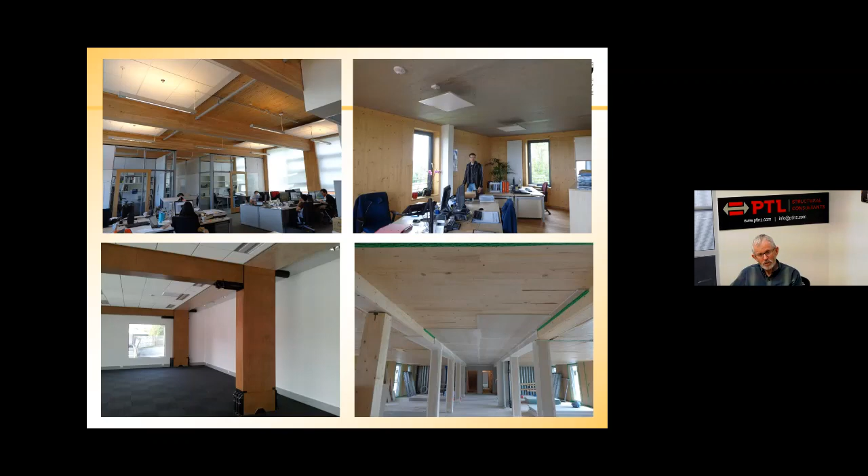I'm going to say something first about pre-flashover fires, then move on to post-flashover fires, because they're two very different parts of the fire experience. It's in the pre-flashover stage where people will be alerted to the fire and have to get out, that's where detectors and alarm systems work. If you're still in the room after flashover, you'll be dead because there won't be enough oxygen to breathe. So the post-flashover stage is where we talk about structural fire stability and fire resistance, which I'll move into.

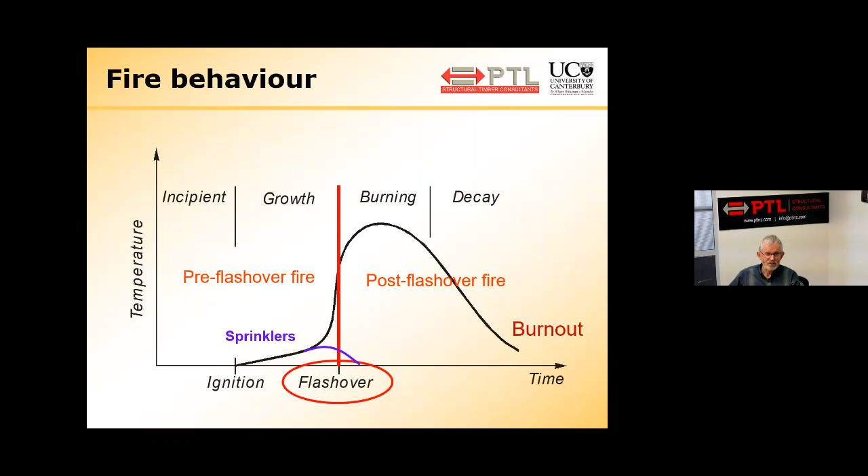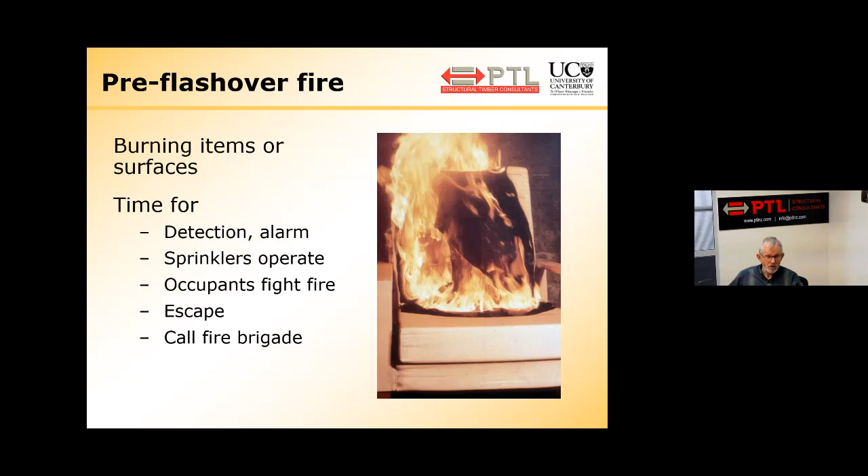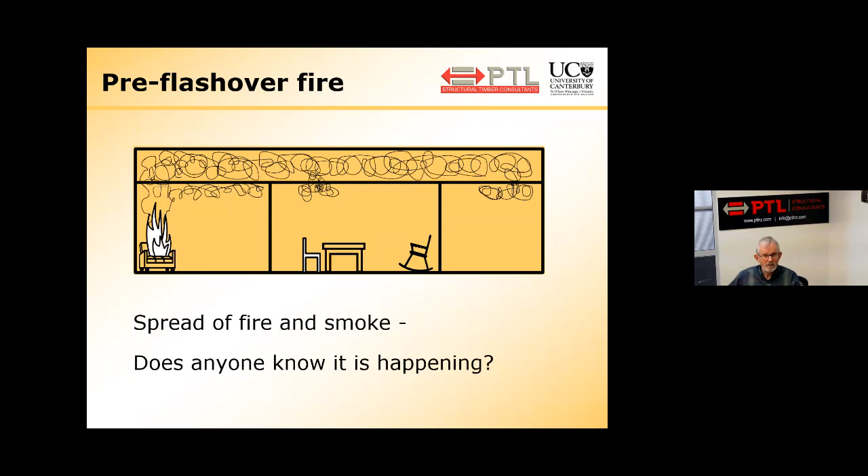Let's say a few words about the pre-flashover fire, which is not of great significance to structural engineers, but it is important. This is where we're talking about burning items or burning surfaces, and this is when we have time for detection, alarm. The sprinklers will operate if they're there, occupants can fight the fire, people can get out, you call the fire brigade - that's the early stage. Fire engineers are concerned about fire and smoke spreading into ceilings, cavities or other spaces, which is part of passive fire engineering that I'm not going to talk much more about.

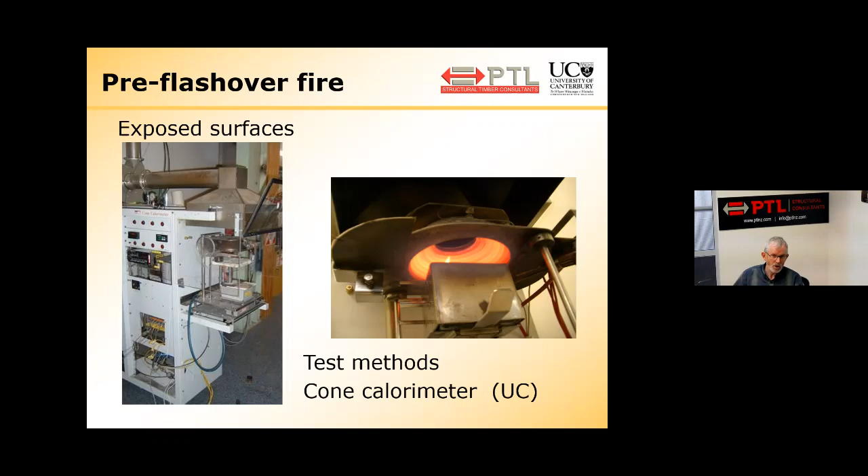The thing that is important in the early stages are the exposed surfaces. What I'm showing here is a device called a cone calorimeter - this one is at the University of Canterbury, but all the fire labs have one. It's a heating device for heating the surface of something to see how it burns and how much heat is released. That's one of the methods of testing wood surfaces to see how they behave in fire.

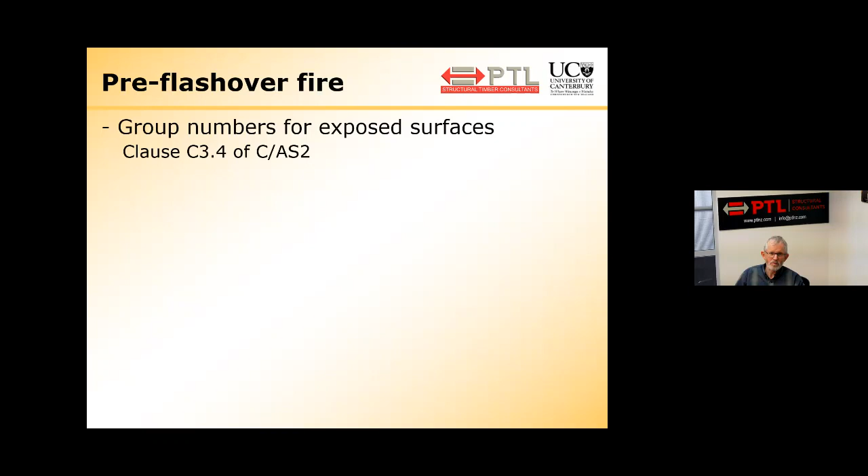Many of you will be aware of the group numbers for exposed surfaces in clause C3.4 of C/AS2. Most of you know that C/AS2 is the acceptable solution for fire design in Part C of the New Zealand Building Code. In that clause, we see a table like this - I've just shown the top of it for clarity, but it lists the material group number required for buildings with or without a sprinkler system.

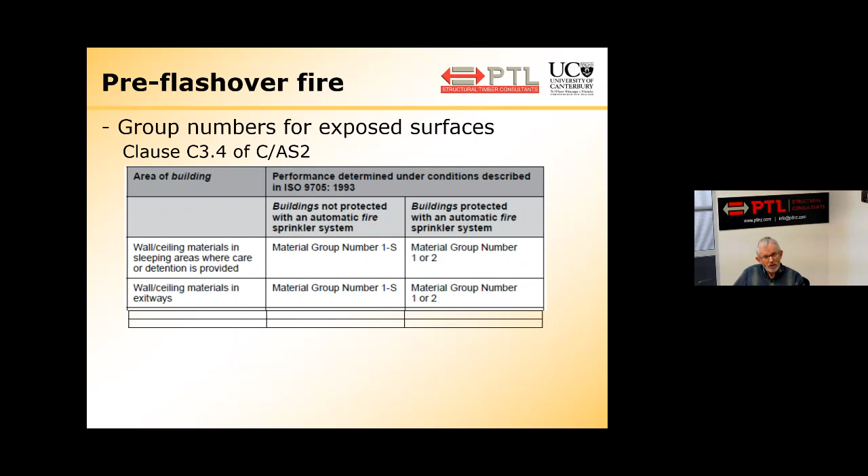In simple terms, we have group numbers 1, 2, and 3. Sometimes there's an S, which indicates a smoke requirement on top of that. But the thing you need to know is that normal wood with no protection is in group number 3. For categories in the table requiring a lower group, you couldn't use wood unprotected, but you could specify an intumescent paint, which would reduce the group number from 3 to 1 or 2, and that's often used. I'm not an expert in that - if you want to know more, talk to your fire engineer.

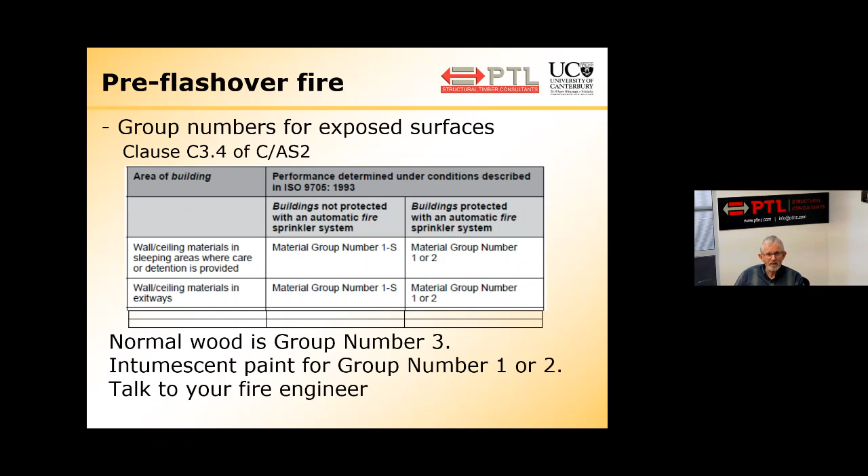I'm going to move on because we've got a lot more to say. Let's now talk about flashover, which is that time when all the combustible surfaces in the room ignite. In the early stages of the fire there will be some heat and smoke, and a hot layer growing in the ceiling, radiating heat to all the surfaces. Then all of a sudden, flashover is a sudden event when everything ignites, sucking all the oxygen out of the room and producing very high temperatures. You don't want to be there when that happens.

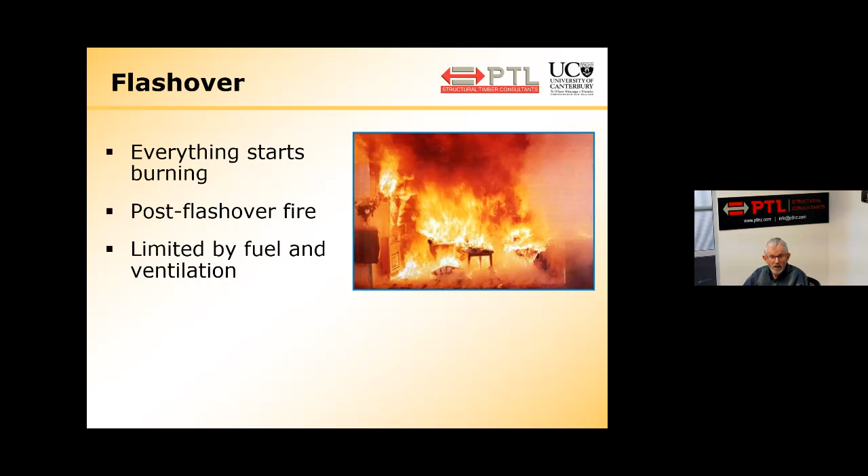In this post-flashover fire, it's limited mainly by two things: the amount of fuel available and the ventilation from the windows. If you've got big windows, you can have a short, fast fire. If you've got small windows, you'll have a long, slow fire. And if there is no ventilation, the fire will go out because combustion needs oxygen.

Let's say a few words about sprinklers, because sprinklers are far and away the best thing you can do to provide fire safety in buildings. There's no question about it. Sprinklers are the way to go.

If the sprinklers are there and they work, you won't have any flashover. You have zero fire resistance requirement. That's not what the code says, but that's the reality of it. If the sprinklers extinguish the fire or control the fire, sprinklers won't always put out a fire, but they're designed so that they keep a fire very small, then that's problem solved.

Although not completely, because sprinklers are not 100% reliable. How reliable are they? Well, the jury's out on this, but 90%, 95%, 98%. Why not 100%? Well, maybe there's not enough water. And by not enough water, that can happen if too many of the heads are activated all at once, because sprinkler systems are only, the pipe work is only enough to supply a certain number of sprinkler heads.

Or if the system is down for maintenance when the fire occurs, or if there's an explosion or an earthquake. We were lucky in Christchurch in the 2010-11 earthquakes, there were almost no fires after the earthquake, but if there had been, there would have been a problem, because most sprinklers rely on water in the street mains, and if there's no water, the sprinklers don't work, and that could be a problem.

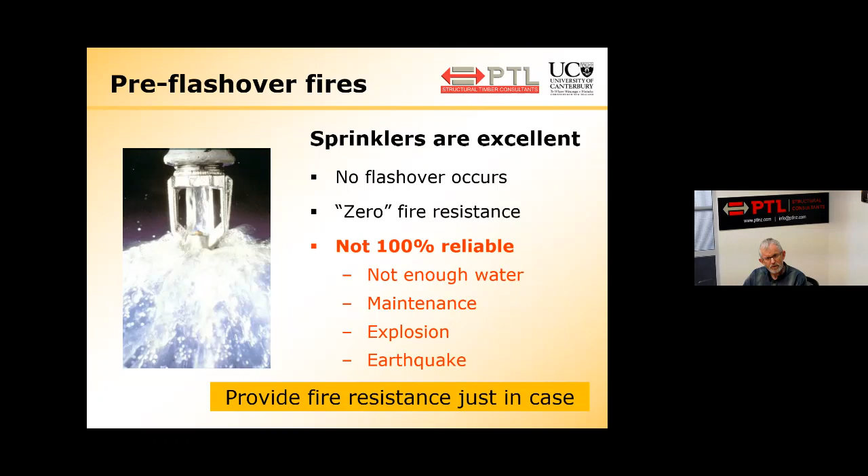So this is what we do. The building code says provide fire resistance just in case, even if you have sprinklers.

But I'm now going to move from a little building like that to a big building like this. And I'll just say a few words about this building. This is the First Interstate Bank building in Los Angeles. And this is way back in, I forget the year, but that's a 62-story building. And that is showing a fire which occurred on the 12th floor. So there were 50 stories above that fire.

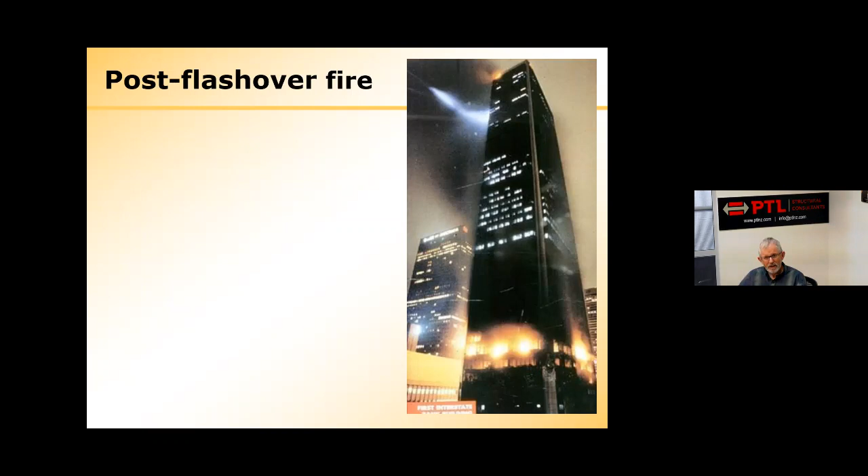And if that happens, what do we need? We have to provide fire resistance. What's fire resistance doing? It's doing two things. It has to contain the fire to prevent the fire spreading inside the building or outside the building.

There are still people up there. See the lights on the upper floors, and if there are people up there, they have to be protected by prevention of the fire spreading. So fire resistance is initially about preventing the spread of fire horizontally and vertically in buildings.

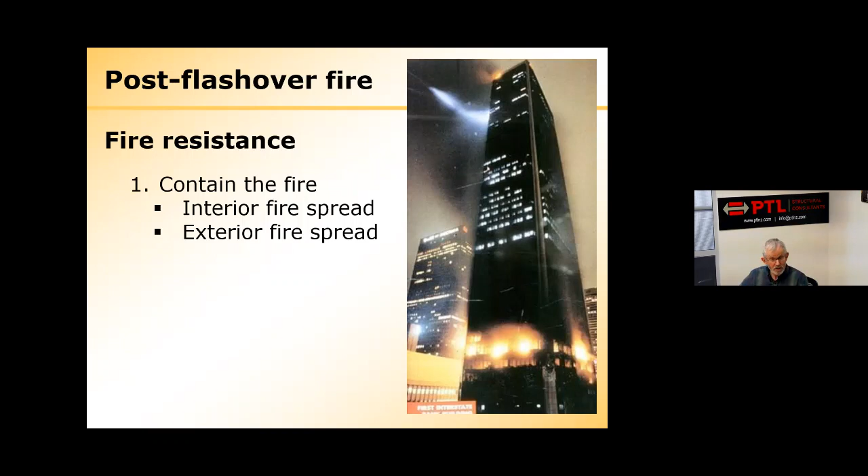But in addition to that, of course, we have to prevent collapse, because if that building fell over, it would cause a lot of problems.

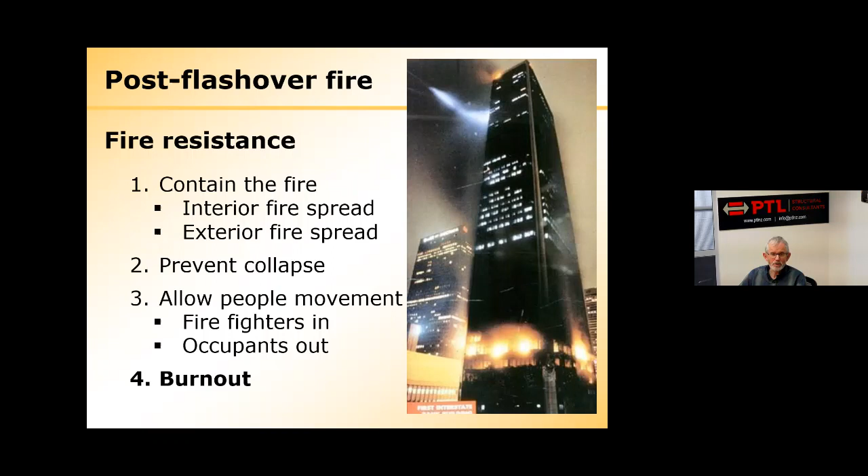The third thing we have to do, which is sort of a result of providing fire resistance, is to allow people movement so the firefighters can get in and the occupants can get out. And in some cases, there's a fourth thing that we should do, which is to design the building for burnout. In other words, answer the question, what happens after the fire goes out? Because if there's nobody there, or if people leave the building and come back tomorrow, what happens in the meantime? Well, that's often ignored in fire protection engineering, but it's actually very important.

Let's move on. Fire resistance. How do we provide fire resistance? Well, the most common way of providing fire resistance is to do a test, a fire resistance test. And there's a furnace that happens to be a Canadian furnace, National Research Council of Canada, but a furnace for doing fire tests of walls. They're all the same.

It's a box where gas can be pumped in and ignited, and there'll be ventilation and measurement of temperature, and that's what the furnace looks like. So that's the primary method of determining fire resistance.

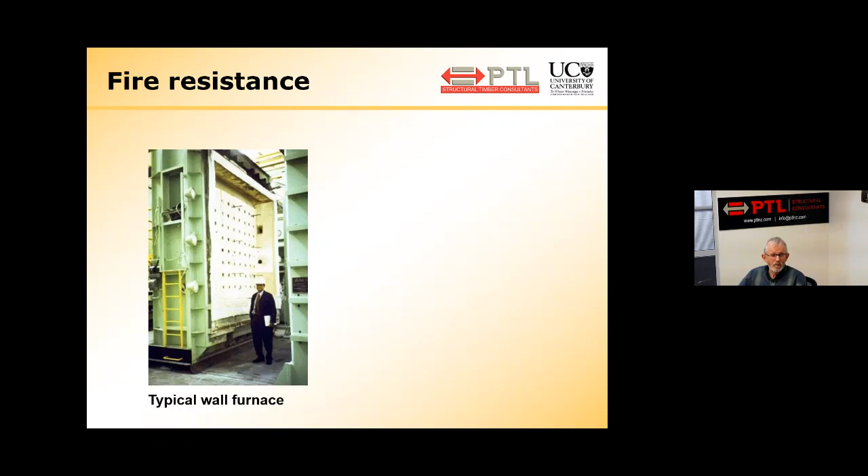To obtain a fire resistance rating, you do a full-size fire resistance test. What do we mean by full size? Well, most testing standards say 3 meters by 3 meters or bigger. Why is it so big? Well, it's that size because you pick up defects in construction, joints and connections which you would not pick up in a smaller furnace.

However, there's another way of obtaining fire resistance, and that's by calculation. We can calculate the fire resistance of lots of things, but it's usually only if that calculation method has been verified by some full-scale fire resistance tests.

And that's a Canadian furnace. We have furnaces in New Zealand, Australia, and around the world. The testing for fire resistance is very similar in all countries around the world.

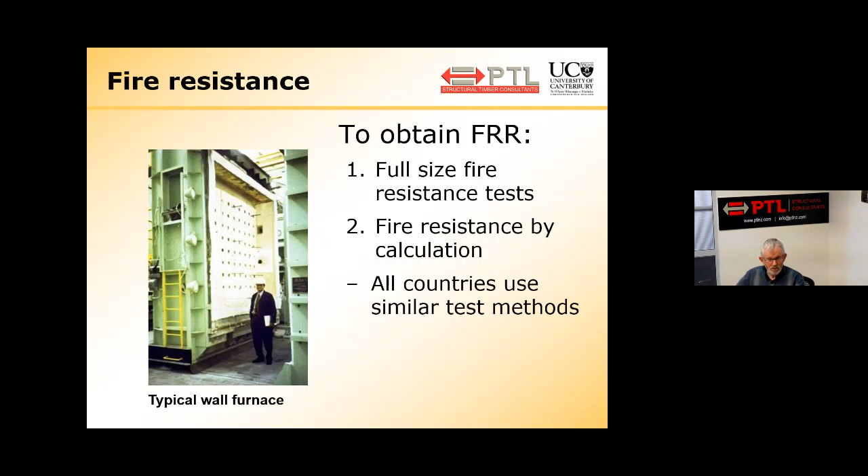I'll just pop back to that question I raised before about fire spread on surfaces and testing for flame spread and smoke produced. Those tests are different. There are lots of different tests for those, which makes things messy. But when we come to fire resistance testing, the fire test furnaces are similar and the fire test results are similar, and that means that in most cases, if we have a fire test report from Europe or the US or Australia, we can use it in New Zealand because of that similarity.

What I'm showing here are the time temperature curves from fire resistance tests. There are 4 curves on here, but the ones we're interested in flow up the middle like that. It's the International Standards Organization, ISO 834 fire resistance test. And that is the same fire test we use in New Zealand, AS 1530, and it's almost the same as the American test standard, ASTM E119, which you can just see dotted behind it.

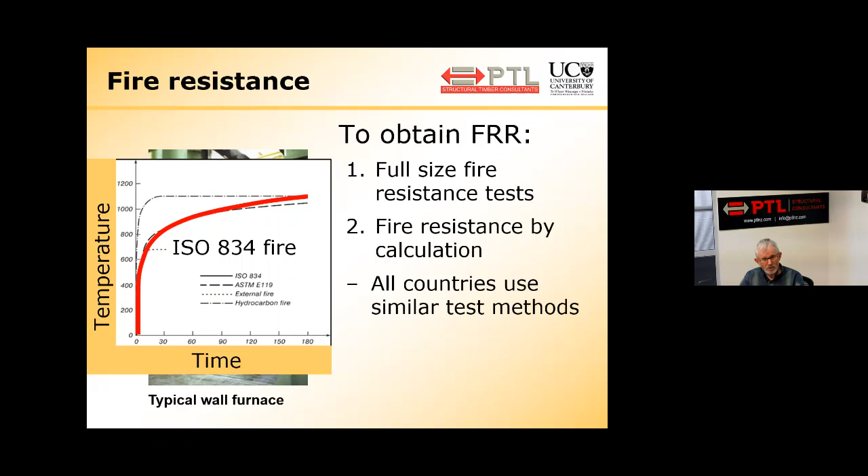The top curve for the hydrocarbon fire is not normally used for buildings, it's used for offshore facilities and things like that, and the other lower one's not used much either. The curve we're interested in is that bright red line, which is the standard test fire, and it doesn't matter where in the world you do a fire resistance test, that's the curve that will be used.

But in order to pass the test, we have some criteria, and you may have seen this before. What I've got in here are the failure criteria for passing or failing a fire resistance test, and there are three criteria. What we call structural adequacy - it used to be called stability, but that was a misnomer because it's not about instability, it's about structural adequacy. To pass the structural adequacy simply means that we prevent collapse, carry the load.

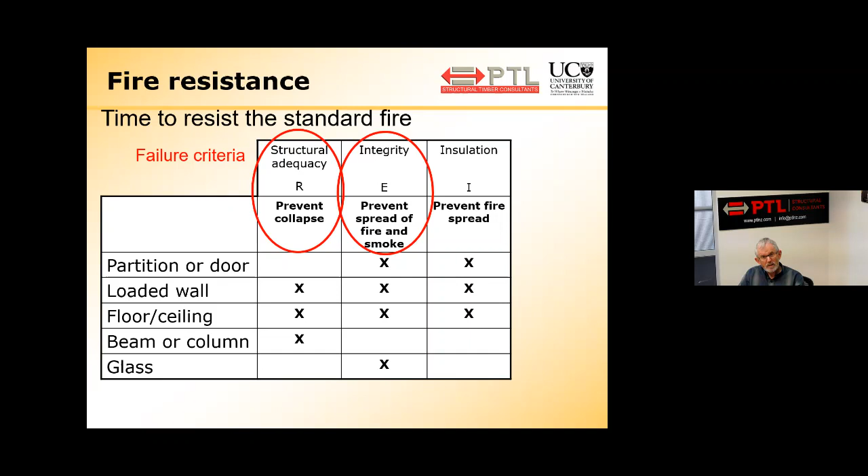And integrity - to provide integrity, we have to prevent the spread of fire and smoke, which means that during the test there shall be no gaps or cracks or fissures where fire and smoke can get through locally. And then we have an insulation requirement, which is just measuring the temperature on the unexposed face to stop the fire from spreading. You see some letters in there, REI, and those are used in Europe. Often they'll be talking about the REI values.

But what you can also see with the X's in that table is that the requirements are different for different things. So if, for example, we have a partition or a fire door, there's no structural load, so we don't have to meet the structural adequacy requirement, we just have to meet integrity and insulation. And if we have a fire door or a partition which has a 60-minute rating, it will often be spelled out like this, -60-60, which means 60 minutes for integrity, 60 minutes for insulation, with no rating for structural adequacy.

On the other hand, if we have a load-bearing wall or a floor ceiling, in those cases we have to provide structural adequacy and we have to provide the containment function, integrity, insulation, and it'll be 60-60-60, or perhaps 30-30-30 or 90-90-90. For a beam or a column which is only carrying load, it has no containment requirement, it would be 60-, and for the glass in a fire resisting window, it will be -60-. So that's what we're trying to achieve in our fire resistance test.

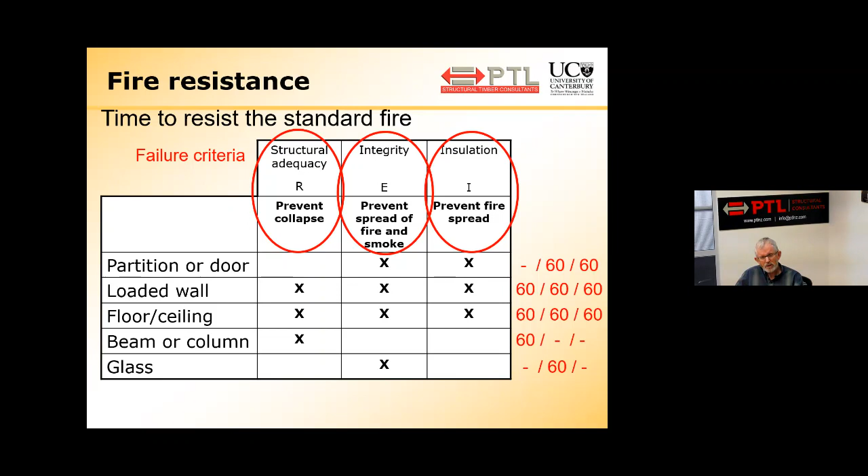I'm going to talk more about structural fire resistance where we don't have the containment option. But let's move on. What I want to say is that standard fire is not a real fire, and everything is different.

The photograph on the right is a fire in a compartment. This was done some years ago at BRANZ. There's just a box there, a fire compartment, about 2.5 by 3.6 meters, a room size, with a facade built there, and you can see huge flames coming out the window.

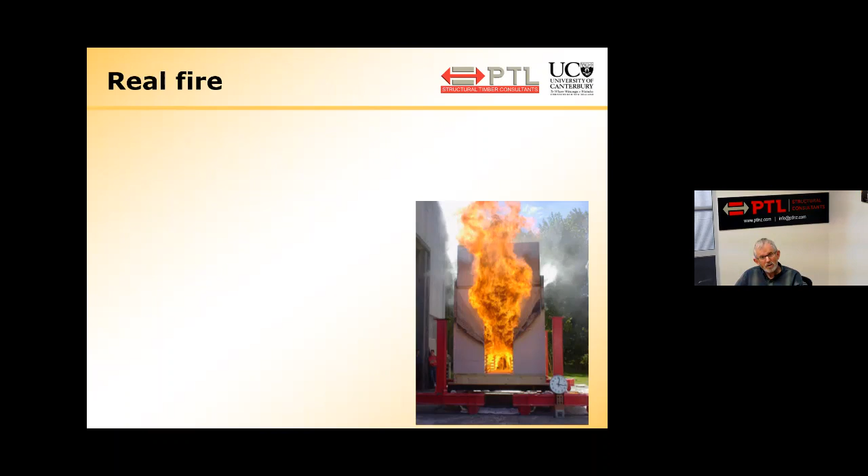How hot did it get in here? Well, here are the temperatures at different places and times. You can see the temperatures rose very rapidly to 800 degrees and eventually to 1,000 degrees. Down here I have the standard test fire, and you can see that in the early stages of a realistic fire, the temperatures are likely to be much hotter than the standard fire.

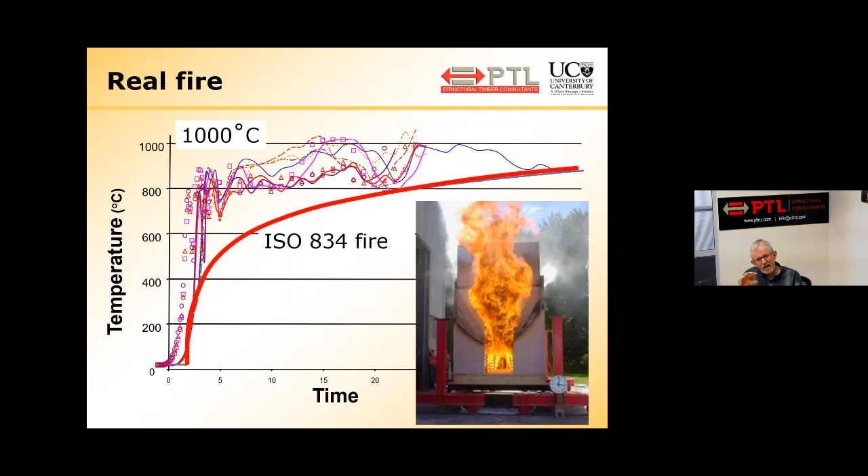So what does that mean to the fire engineer? I'll come on to it in a minute, but all of the fire tests referred to for testing walls, floors, and penetrations use the standard fire. So we have to take some account of that if we're going to be using these for a hotter fire.

So this is just a bit more fire science. In the building codes around the world, we have something called a parametric fire. The parametric fire is a calculated, realistic fire, which gives a graph of time versus temperature.

There are two different sets of curves there, because at the top we have the gypsum curves and lower down we have the concrete curves. Those are different because there are three factors that affect the fire severity. One is the thermal properties of the building enclosure, and that's why if we have a highly insulating compartment, we get hotter temperatures.

If we have a material like concrete, which can suck a lot of the heat out and get hot, then the fire temperatures are cooler.

And then we have the size of the windows in the fire cell or the fire compartment. This set of graphs has been done for one set of window sizes with an opening factor of 0.04, which is a sort of average opening factor.

If we have a fire in this room with a certain amount of fuel load, we'll find that we'll have a time-temperature curve that will go up the green line, and when the fuel is all burned out, it won't be quite as sudden as that, but as the fuel is burned out, we'll have a decay period and the fire will drop.

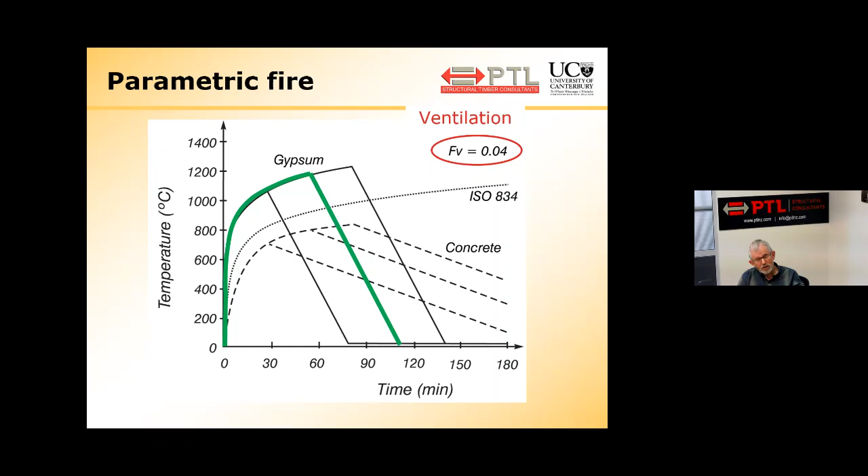Then we go back and look at the standard curve. The formula for the standard curve just goes on and on, but there are methods of calculating a time equivalence. The time equivalence simply says that if we know what the real fire looks like, we can say that's equivalent to a longer time of the standard fire, and that can be used in lots of ways. So that's all I'm going to say about that now.

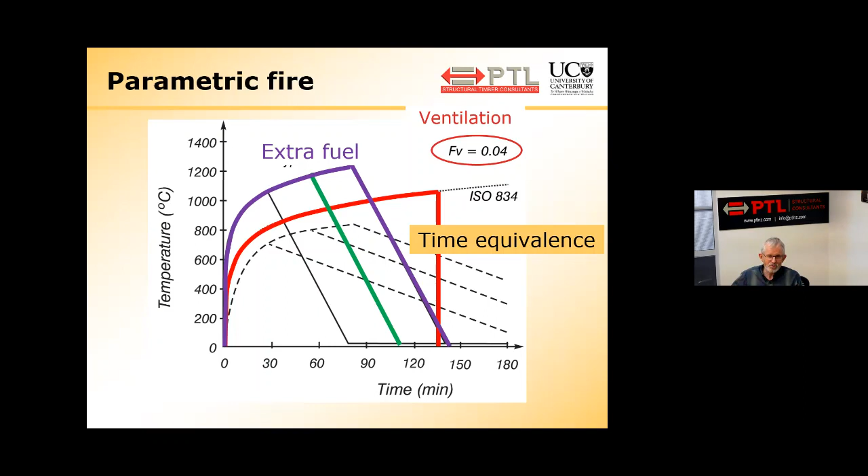If you want to know more, do some more reading, but it will help you get some understanding of where we're going.

Let's get started. Why do I say let's get started? Well, just about everything I've told you up till now applies to all buildings - concrete buildings, steel buildings. I now want to start talking specifically about timber buildings and what's different when you have wood in your building.

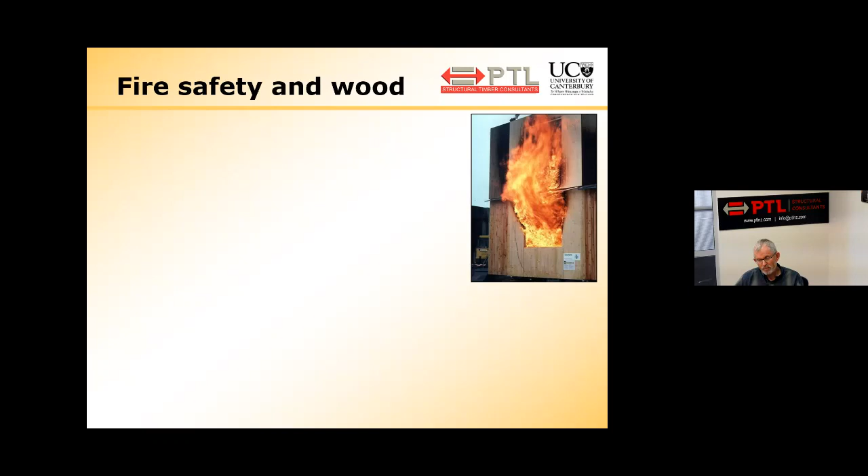There are three main things I want to say. The first one is that wood surfaces are combustible. Wood burns. And there are people out there who have various paint-on finishes which will stop wood from burning.

They'll tell you that, but for most of them, I would say I don't believe it unless you can prove it. And there is really very little proven material that can stop wood from burning.

The intumescent paints we talked about before can stop the surface spread of flame in a building, but once the fire gets out of control, we get into a post-flashover fire. The temperatures are so hot that surface finishes will not stop the wood from charring. So if we're going to stop the wood from charring, we have to cover the wood with something.

I'll come onto that later. More than that, if the wood surfaces are exposed, we have to allow for the extra fuel load in that wood. But the best thing we can do is install sprinklers and solve the problem.

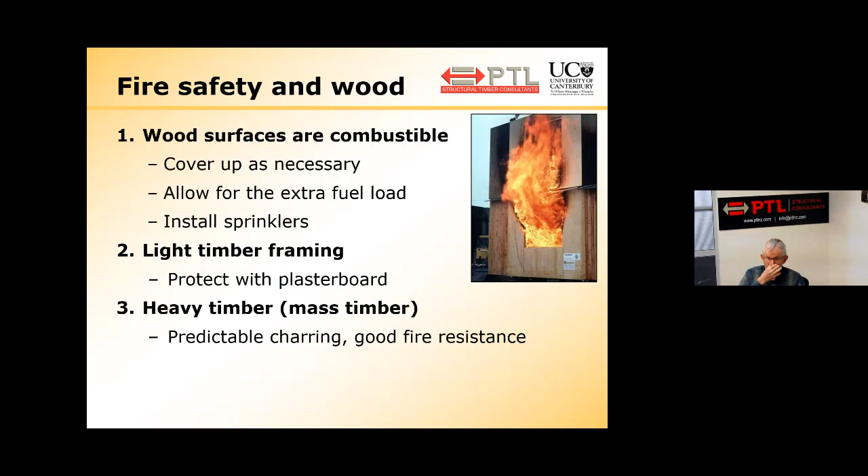I'm going to talk a bit about light timber framing, 2x4 construction, studs and joists, and the strategy there is simple: we protect with plasterboard. I'm then going to talk about heavy timber, or mass timber as it's called now, where from a structural point of view we have predictable charring, good fire resistance, and we can sort a lot of things out. So let's move on.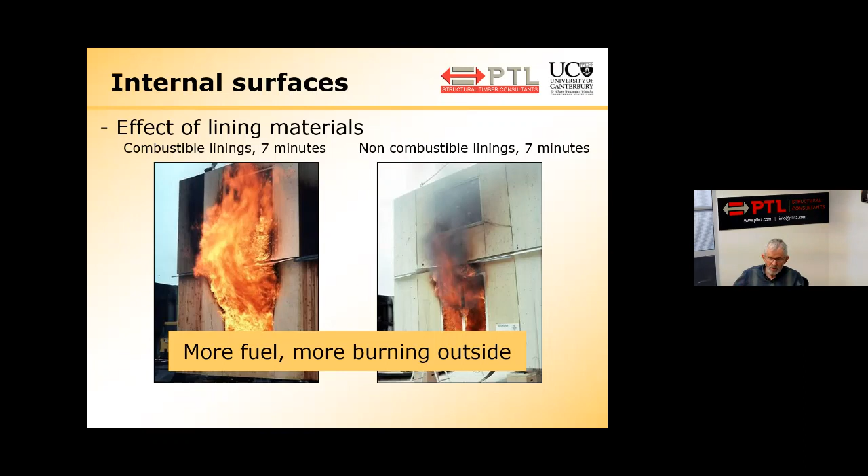If we have more fuel in the room, the fire becomes ventilation controlled. When it's ventilation controlled, more of the combustion takes place outside the room than inside, because there's not enough oxygen in the room. That can actually be a good thing inside the room, because it means we don't have as much energy released there. But on the other hand, it's a bad thing because it can lead to fire spread up the building via the windows. So it makes a difference.

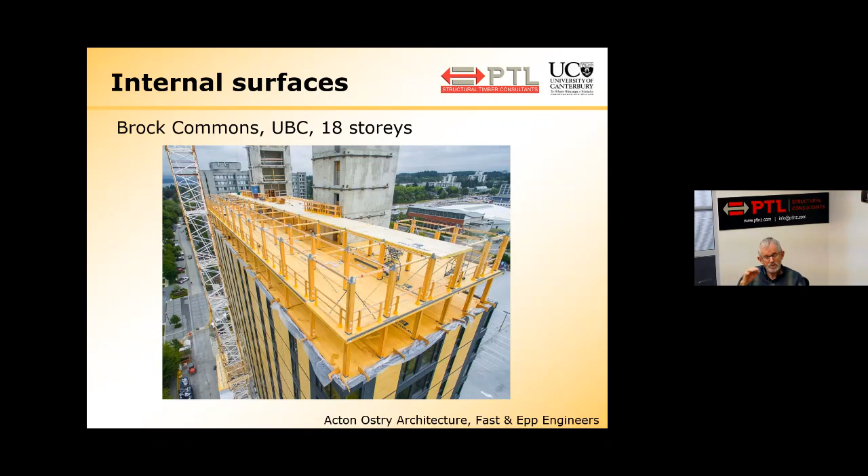To give you an example of where this might lead: some people call this the tallest timber building in the world, Brock Commons at UBC, which has concrete stair cores and lift shafts - you can see them in the background. There are 18 stories of wood with CLT floors and glulam columns. But if you go to that building, you don't see any wood at all. It's fully encapsulated, and all of the wood is protected with 3 layers of gypsum board.

So if you're going to build in wood, why do you build in wood? Well, the first reason is to see the wood - but in this building, you won't see any of it. The second reason is to sequester carbon and avoid the carbon polluting effects of concrete. You get that benefit no matter how much encapsulation you have.

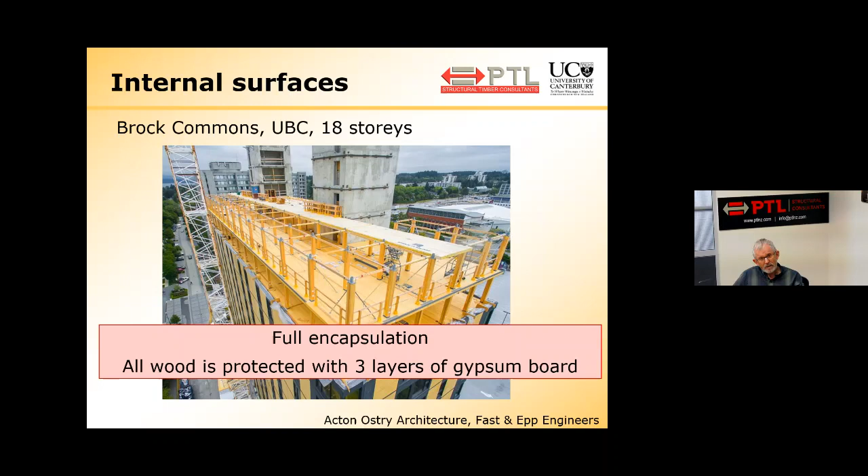And time and cost. So let's just go back again to this picture. Containment - I want to talk about containing the fire, because this is very important.

I've got some photographs here I'll cover briefly, looking at some Japanese fire tests from nearly 10 years ago, sponsored by the Japanese government. They were looking at fire safety in schools, built a whole school building like this, and lit a fire deliberately on the ground floor to see what would happen. The building burned down. There was plenty of fire resistance in the floors and walls, but what was missing was fire resistant gaps, joins, doors, and interfaces.

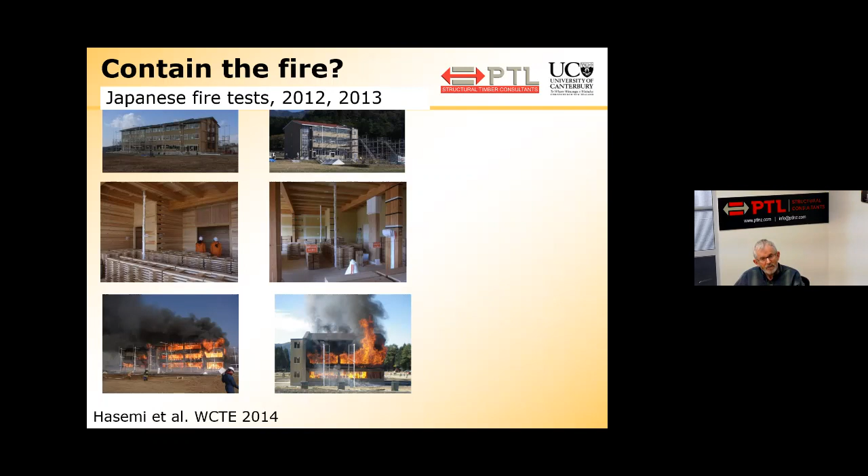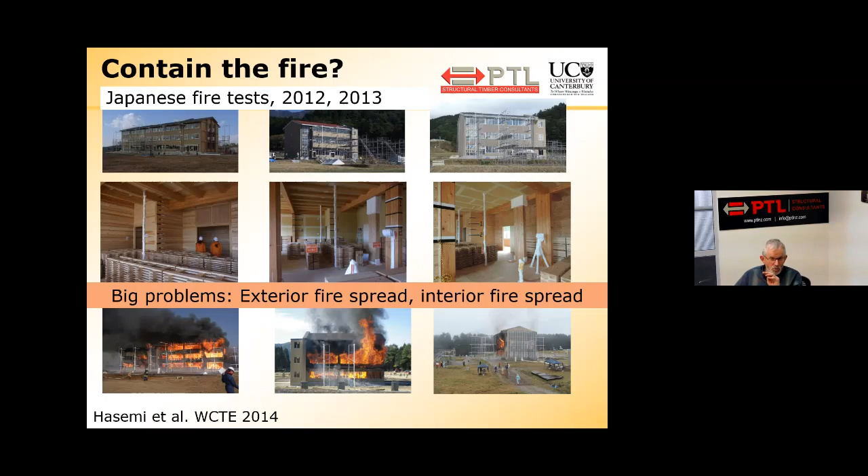They did the same thing again with a second building and managed to contain the fire to 2 floors. They did it again, and eventually managed to contain the fire to the room of origin. But this cost them $10 million. And what were the problems? Fire spreading outside and inside. So your fire engineer is going to be concerned about this. This is why we provide fire resistance, but we actually have to provide more than fire resistance.

So light timber framing is fantastic in a fire. It can do its job provided there's enough gypsum there for the duration of the fire.

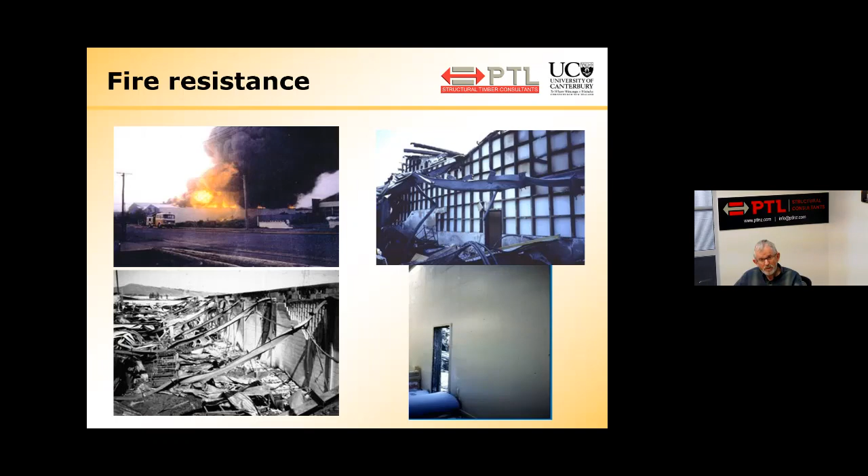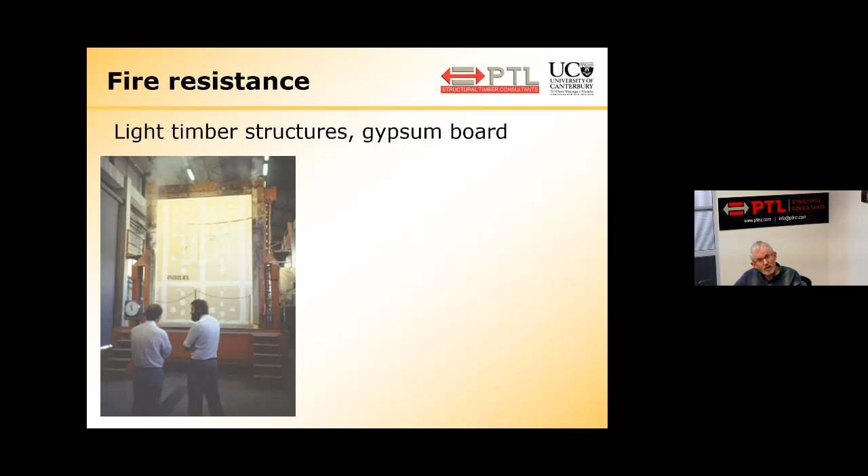Here's a test at BRANZ with a fire wall being tested. In most cases, that's all you'll see for the entire duration of the fire. Sometimes you get an integrity failure like this and it actually burns through - very unusual, but it can happen. In either case, after the fire, when the GIB board is taken off, the studs are charred. The fact that you get a 60-minute fire rating for a GIB board wall doesn't mean no charring.

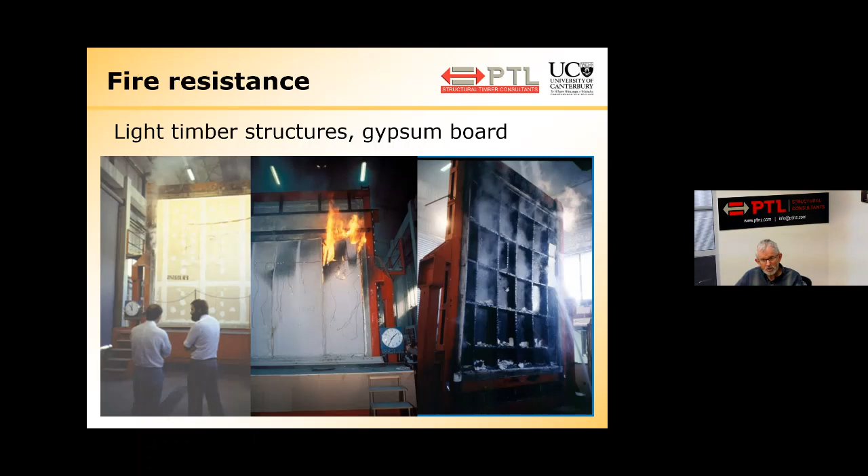It means that the wall can meet those 3 criteria for 60 minutes. In other words, it can carry the load for 60 minutes, charring or not, and it can stop fire spread through integrity and insulation.

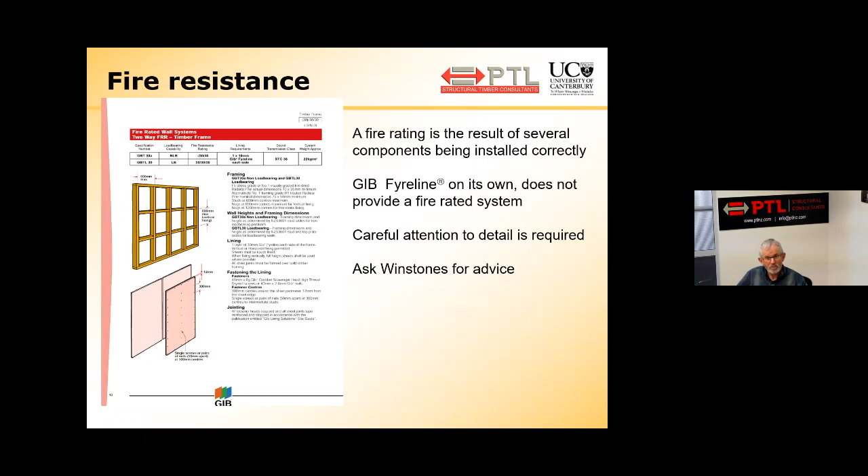And if you want to know more about that, go talk to Winstones Wallboards and look in the GIB manual, because all the stuff is there. And if you don't see what you want, talk to Winstones.

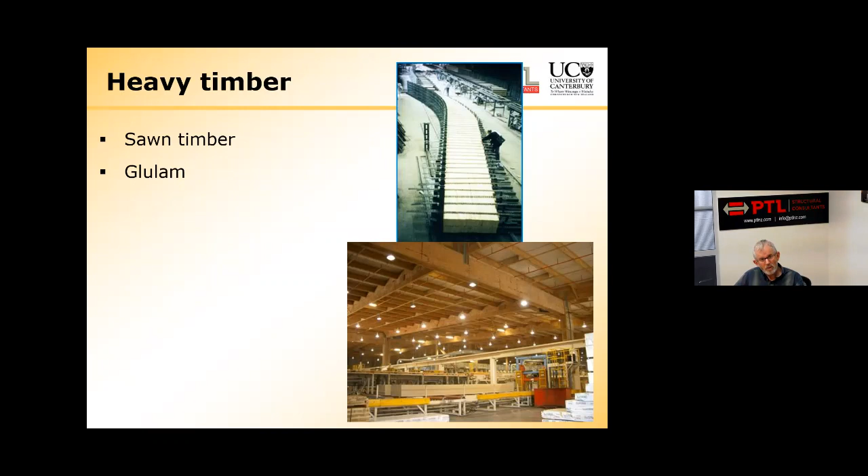I'm going to move on to heavy timber. Big glulam beam on the right, an LVL roof lower down. Heavy timber can be large pieces of sawn timber, but not very often - more often we're talking about glued laminated timber or laminated veneer lumber. The new product now is cross-laminated timber, big new panels. Red Stag are just opening their factory now in Rotorua, and they can make huge panels, 16 metres long and 4 metres wide, up to 200 millimetres thick - enormous lumps of wood.

Question is asked often about adhesives - what's the glue that's used to glue these things together? The traditional adhesive is resorcinol formaldehyde, which is excellent in fire. More often we have melamine products, which are pretty good in fire. The most recent products, including cross-laminated timber, use polyurethane adhesives, and there's a bit of a range there.

The standard polyurethane adhesive has some problems in fire, but Henkel, who produced that, now have a new fire-resistant material, so I'm going to specify fire-resistant adhesive for all of my glued wood products, and we'll just see how that plays out. What's happened is that fire-resistant adhesives are now required in North America - if you make cross-laminated timber in the US or Canada, there's a manufacturing standard which requires the fire-resistant adhesive. In Europe, New Zealand and Australia, it's not yet required, but I think we're going to see it being adopted. Watch this space.

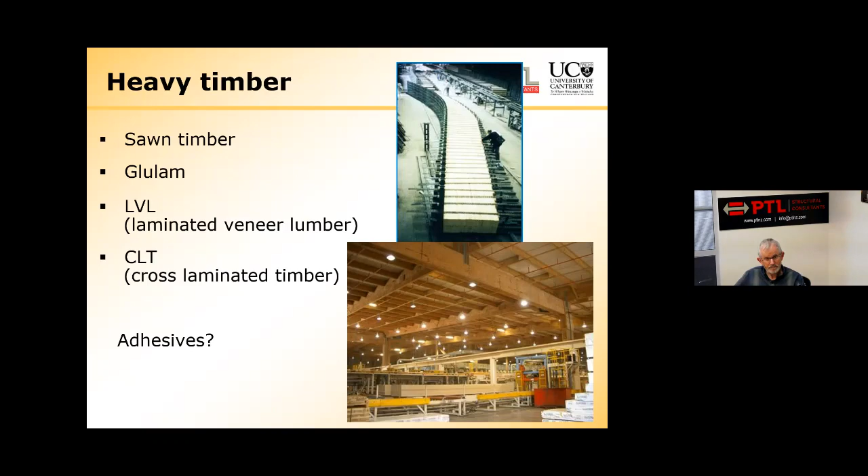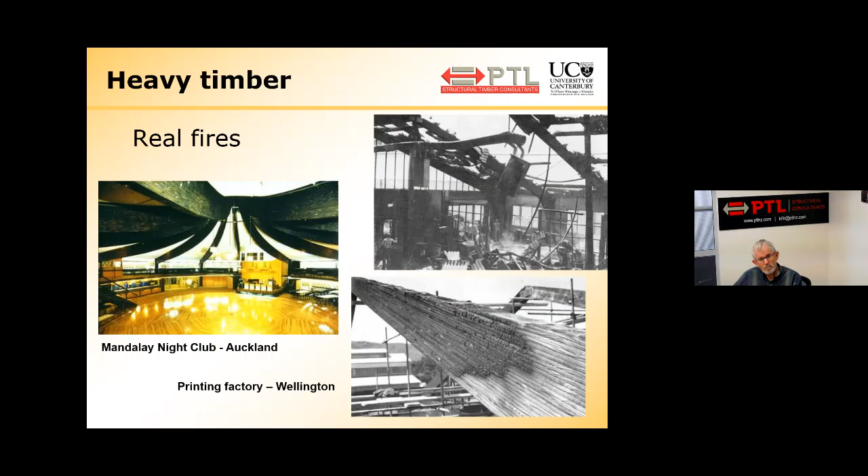I'm going to move on pretty quickly. These are old photographs of buildings in New Zealand which had fires, and the charring was such that the buildings were repaired and reused after the fire. And a timber bridge in Canada, same thing.

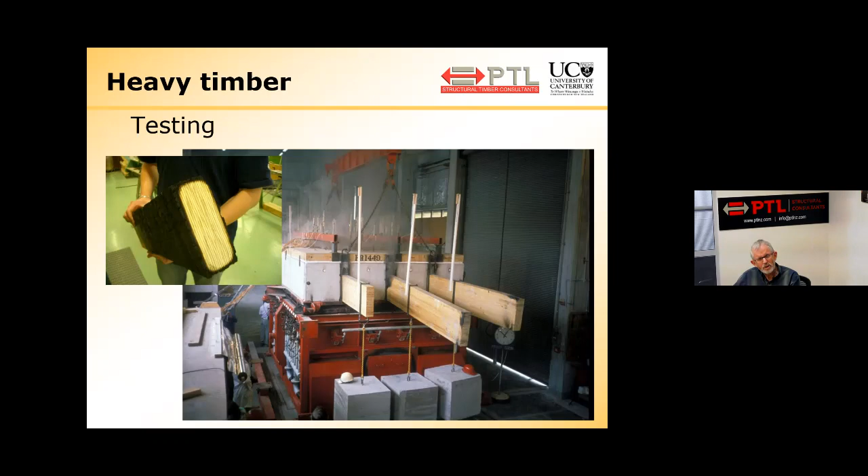Here's a fire resistance test at BRANZ of a floor and beams with big applied loads, with concrete blocks on the ends. This is not from that test, but what we all know happens with massive timber in a test is we get charring around the outside, and we can rely on the wood on the inside to provide the fire resistance.

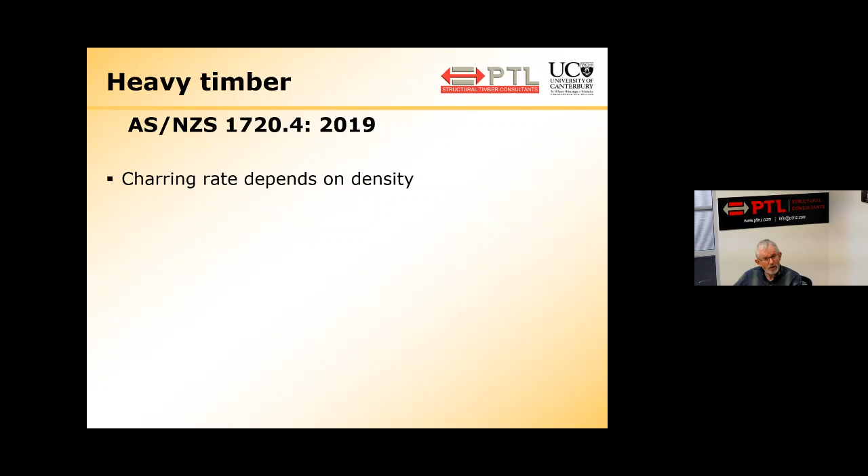We have a new standard, AS/NZS 1720 Part 4 2019, which is going to replace the fire chapter of 3603, and that's got some clauses which tell you how the charring rate depends on density. It says specifically for New Zealand grown radiata pine, the charring rate is 0.65 millimetres a minute, but we have to also take off a 7 millimetre zero strength layer under the char.

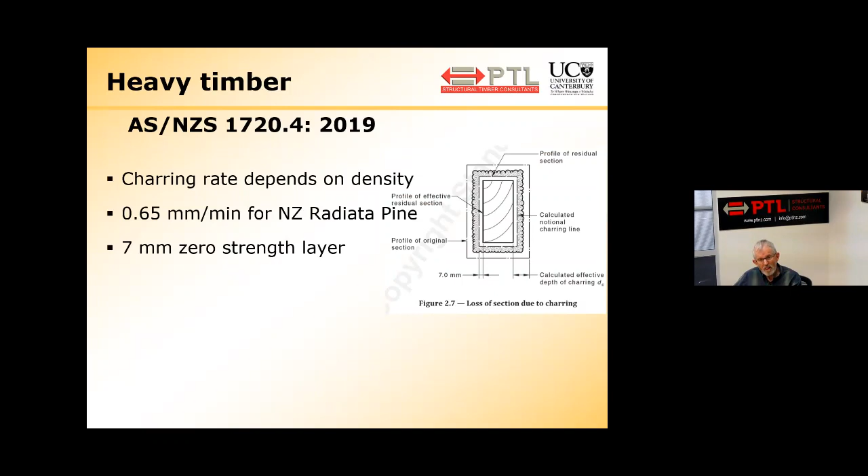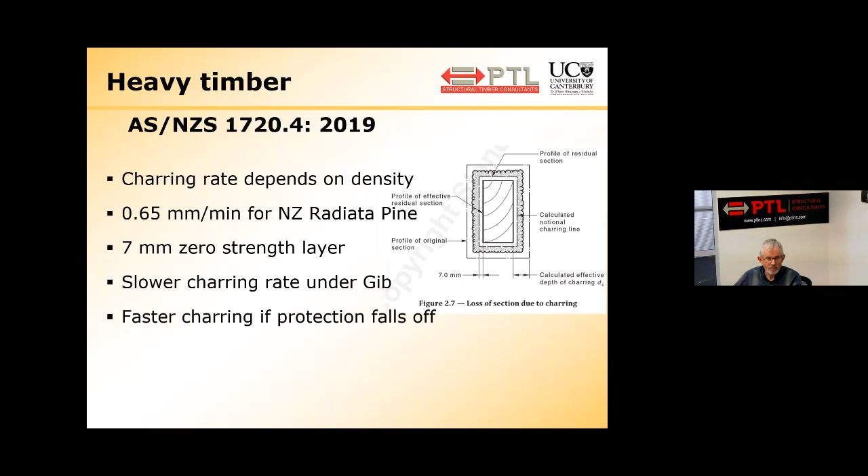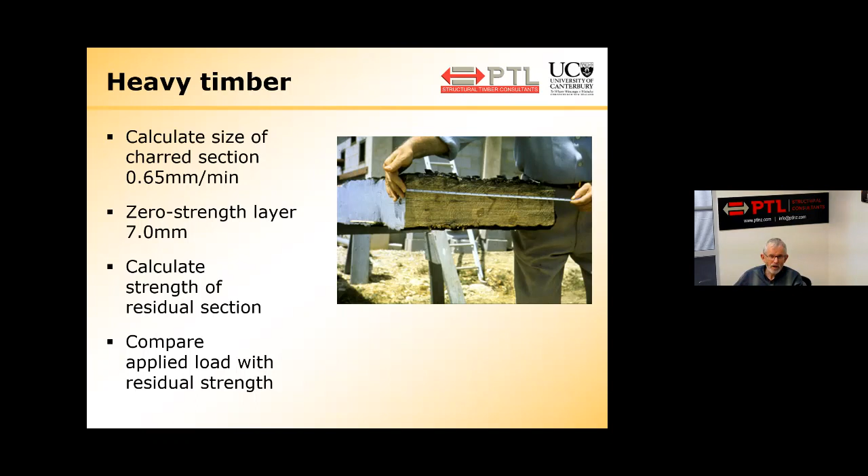That's the picture from 1720 Part 4, you can look it up. There's a slower charring rate under gib if we have gib protection. If we have enough gib, there'll be no charring. If it's thinner gib, there'll be some charring, and then a faster rate if it falls off. If we have a massive timber beam like this, we can calculate the charring rate and how much wood is left, and we calculate the residual strength, and we compare the applied load with the residual strength, remembering that we have a reduced load combination for fire, which helps a lot.

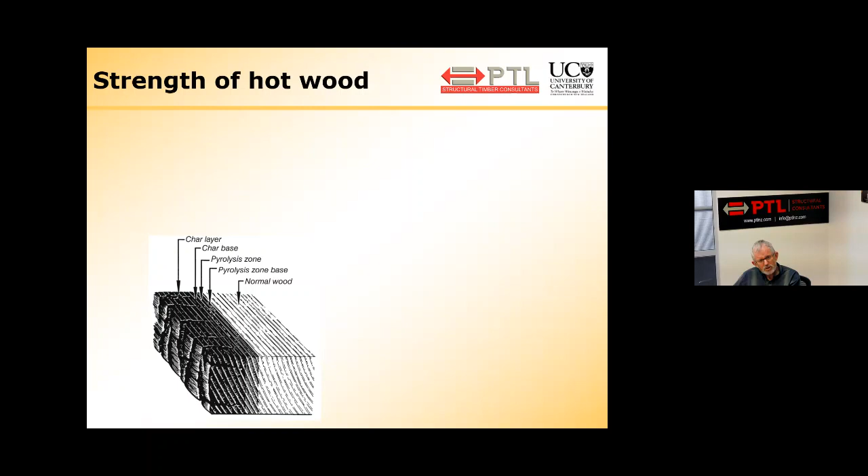The wood underneath the char does get hot. So eventually, somewhere underneath the pyrolysis zone, we have normal wood. How far down is the normal wood? Well, the char layer's at 300 degrees, but the wood is heated about 30 millimetres below that layer, and there's a graph showing that. I'm not going to dig into that, but that's from my book, Structural Design for Fire Safety. You can see that there.

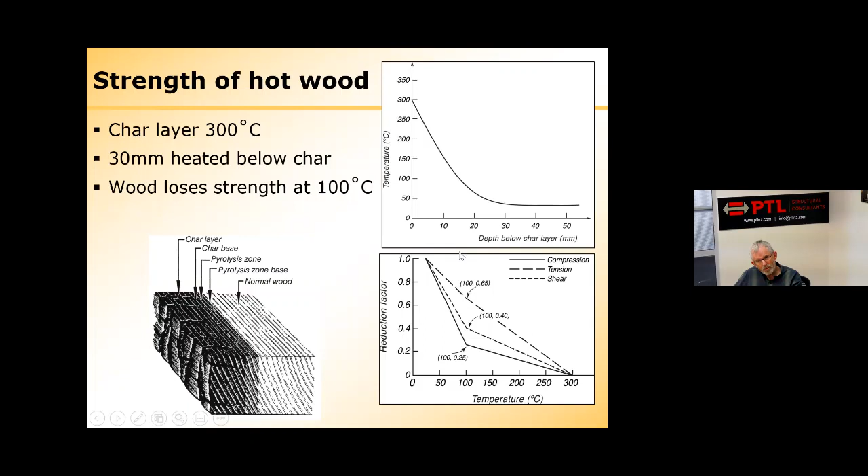And that wood loses strength at 100 degrees or even less, and that graph shows the loss of strength of the compression strength, tension strength, shear strength with temperature. So we've got 100% strength at 20 degrees, we've got 0 strength at 300 degrees when it's turned to charcoal, and there's a pretty big reduction by 100 degrees, so we need protection.

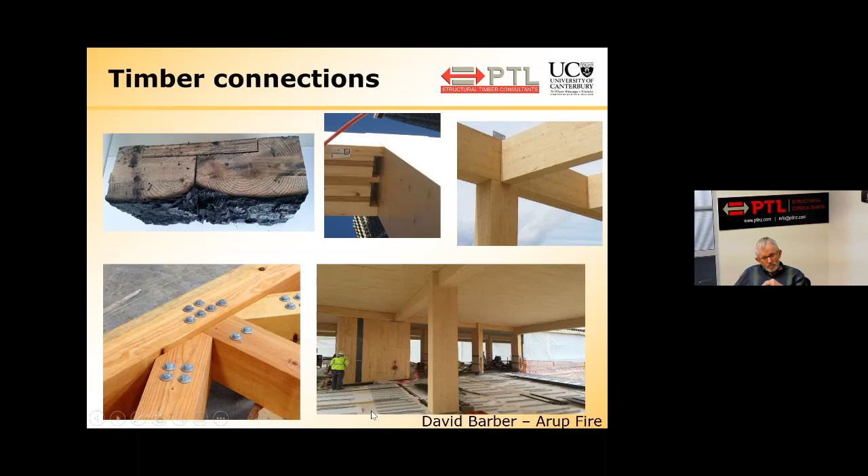And the wood itself is pretty easy. It's easy to design a beam or a column or a floor for fire resistance using charring. That's simple stuff. Connections, much more difficult. I just acknowledge David Barber, who's a Canterbury graduate, but Arup Fire, who's helping to write a new document on fire connections. These are his photos.

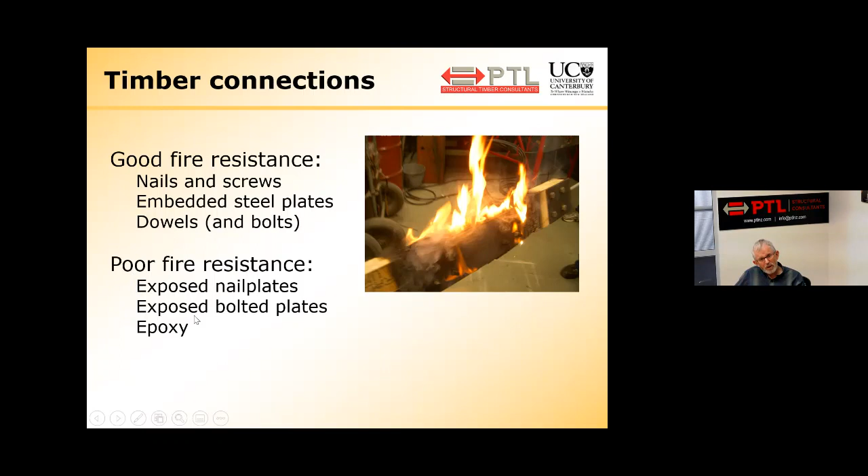So timber connections in fire, how do you get good fire resistance? You use lots of small fasteners, nails and screws. You bury your plates in the wood so that the steel can't see the fire or the fire can't see the steel. And you use dowels and bolts - not so good - but dowels with the dowel heads are hidden. If you have poor fire resistance, well, exposed nail plates, exposed bolted plates, and epoxy.

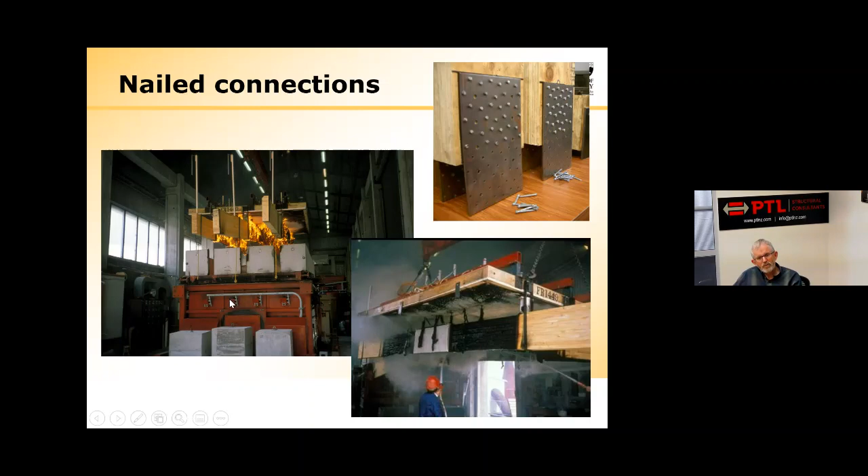So I'm just going to rush through some photos here. This is what happens in nailed connections. Very poor fire resistance because the steel gets hot and it heats up. You can protect it with gib. You can try intumescent paint, but it's very marginal, very marginal. A nail plate, truss plate like that, hopeless in fire.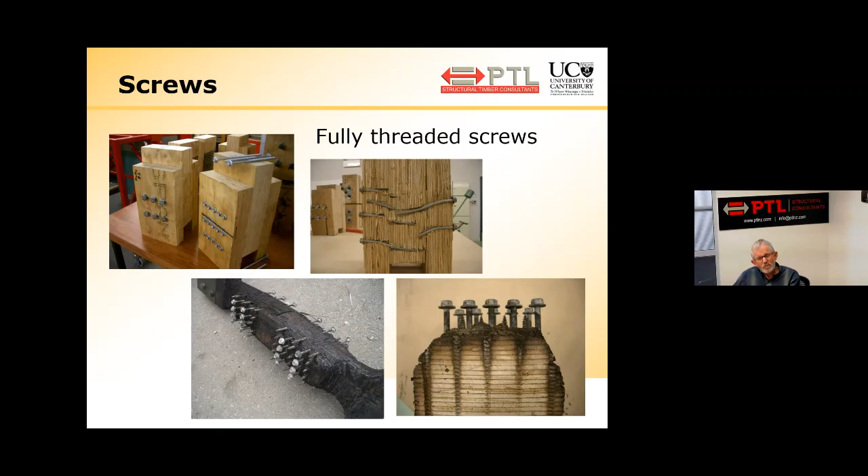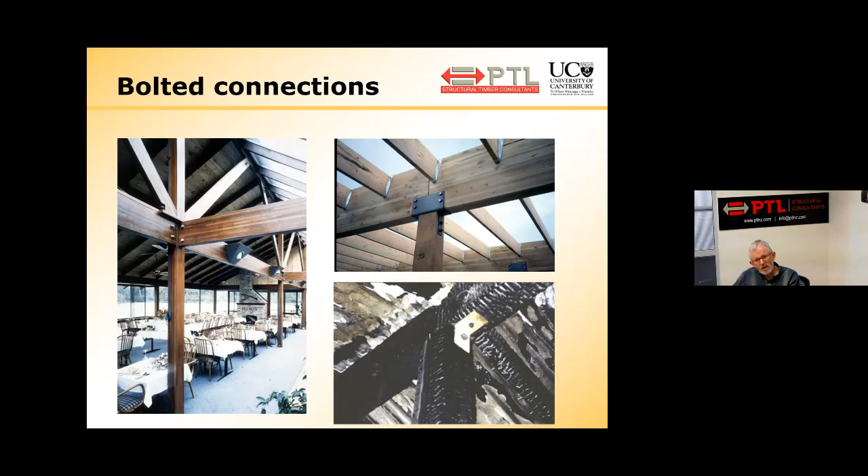Screws, much better. They conduct some heat into the wood, but fully threaded screws work well, and that's probably your fastener of choice. A bolt is a problem because the bolt head heats up and the steel plate heats up, and then if the bolts get hot, they cut their way through the wood, like the wood turns into cheese. It's like pushing a knife through the cheese. It just cuts its way through, and so it's all very limited.

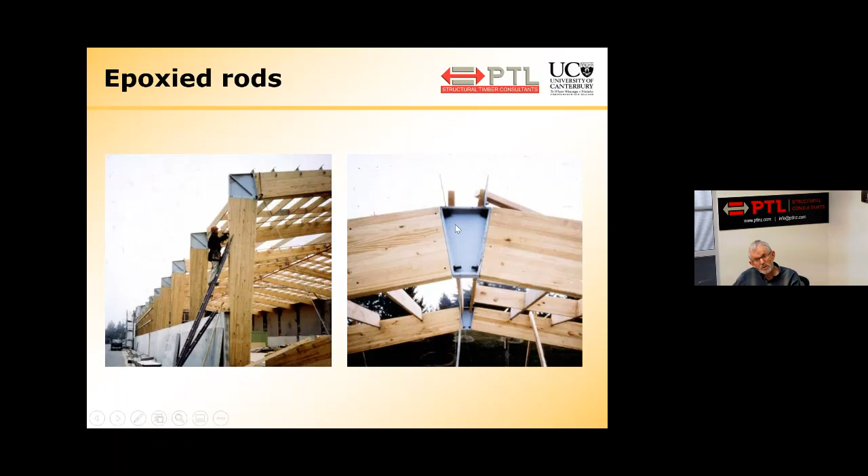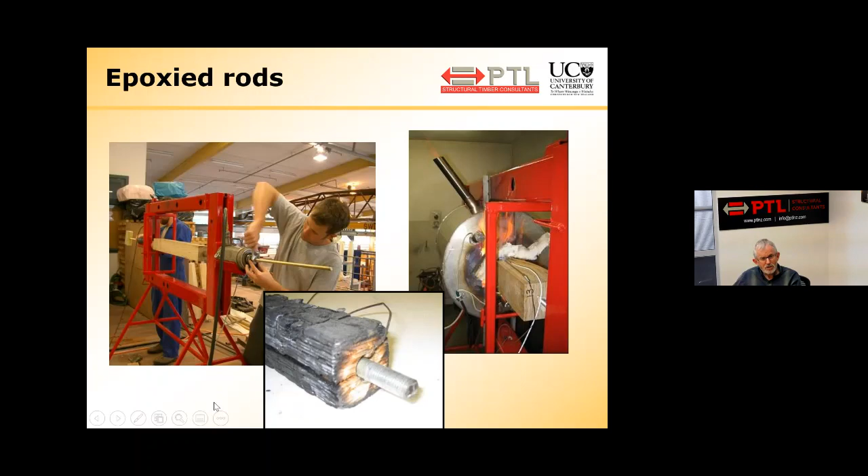Epoxied rods - epoxy is hopeless when it gets hot. If you can save it from getting hot, it's fine. But if you have an unprotected connection like this, the steel will get hot very quickly, the rods will get hot very quickly. And there's an old photo of Stu Harris - you're not watching this, are you, today, Stu? That was taken a few years ago, but we've done a lot of work on that. But basically, the problem is that the epoxies are not good for temperatures more than about 50 degrees.

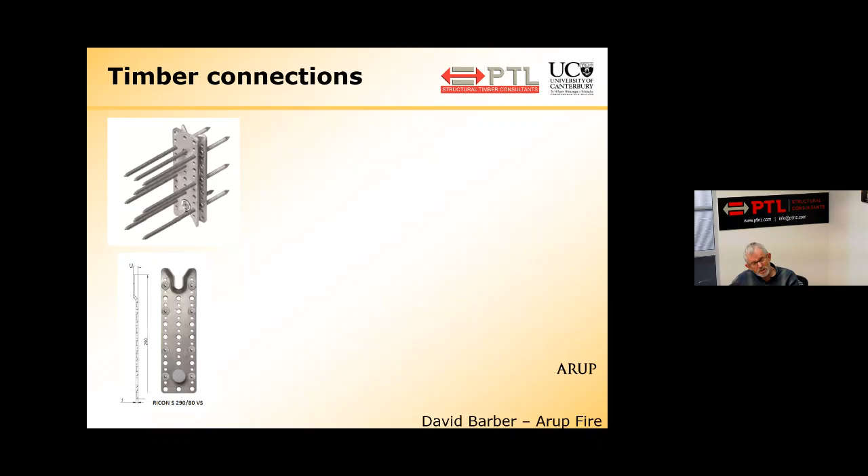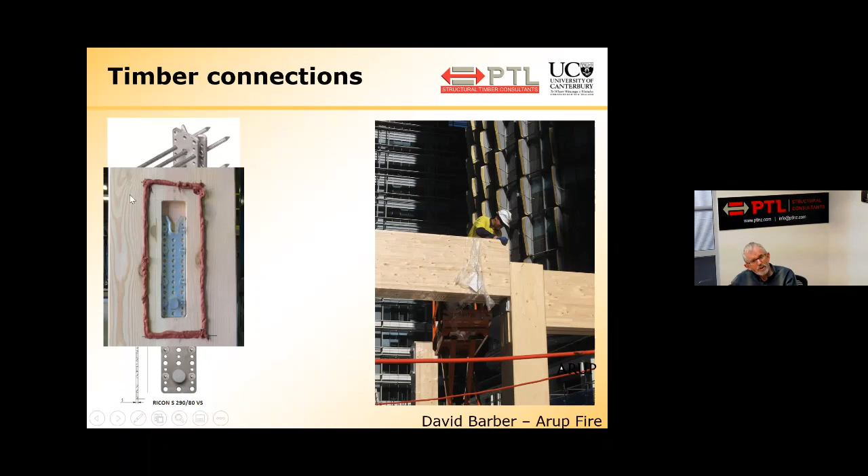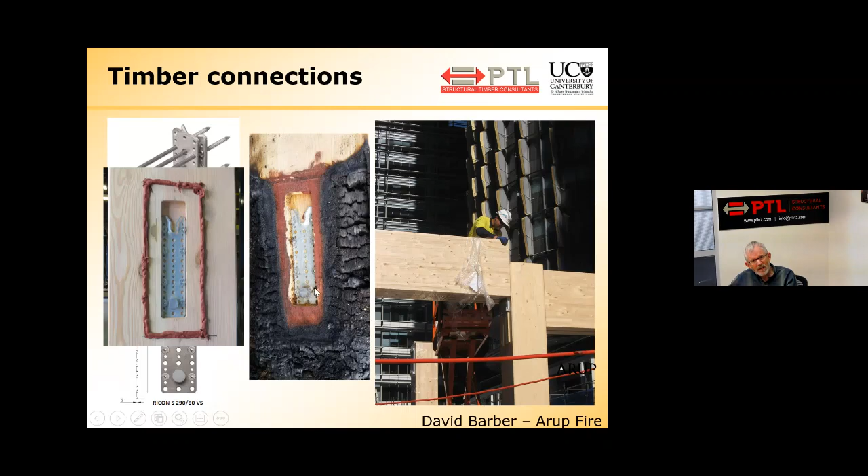If you want to provide good fire protection to a steel connection, bury the steel. Here's some more photos from Arup. So a big steel column connection using this kind of dovetail connection. And what did they do here? They put an intumescent ring around it and then tested it. And after the test, what do you get? The wood's all charred. The intumescent paint has kept the heat out. The connection is at room temperature. Fantastic. Cover up the steel and hide it.

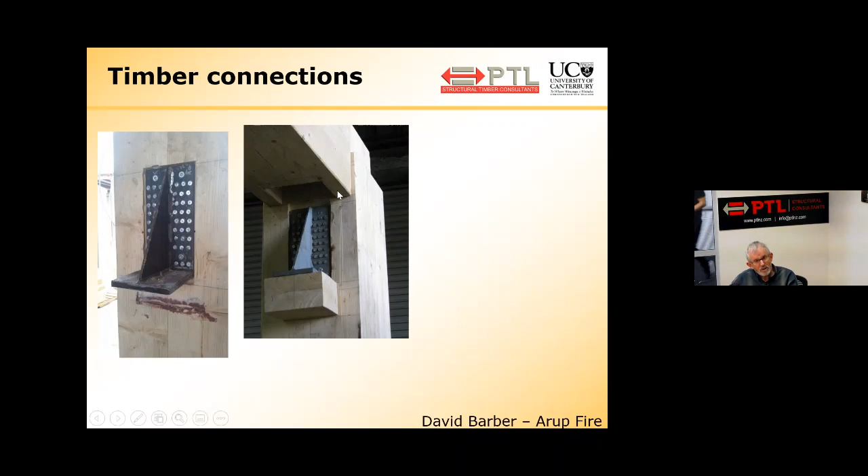This is another test which Arup did in America for a building called the Framework Building, and they had to get a 2-hour fire rating on this. You see this huge block of wood down here and this beam being dropped in with a massive amount of wood protection all around the sides. They did a fire test and a char on the outside, and they got their 2-hour fire resistance rating.

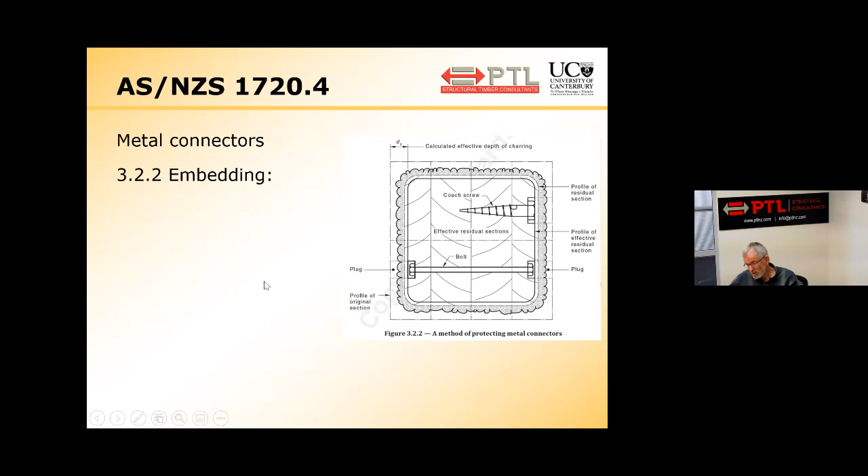Cover up the wood, it's the way to go. There's a clause in 1720 Part 4 about metal connectors, and it says you can do three things: you can embed them, or protect them by keeping steel plates to 120 degrees. You need a lot of gib or intumescent paint to do that, but actually intumescent paint won't do it because it doesn't activate till it gets to 200 degrees. So that's not possible. It says you can protect steel dowels by keeping their temperature to 300 degrees.

This is actually the hard part of designing a timber structure for fire resistance. The member design is easy, the connection design is not easy. What guidance have we got? The only guidance is this standard, AS/NZS 1720 Part 4, published as a joint standard by Standards New Zealand, not yet adopted by MBIE. The guidance for connectors in there is very weak, it's guidance only at this stage. If you really want to go further, you've got to go back to the Euro codes and see what's there, but it's actually a moving feast, changing all the time.

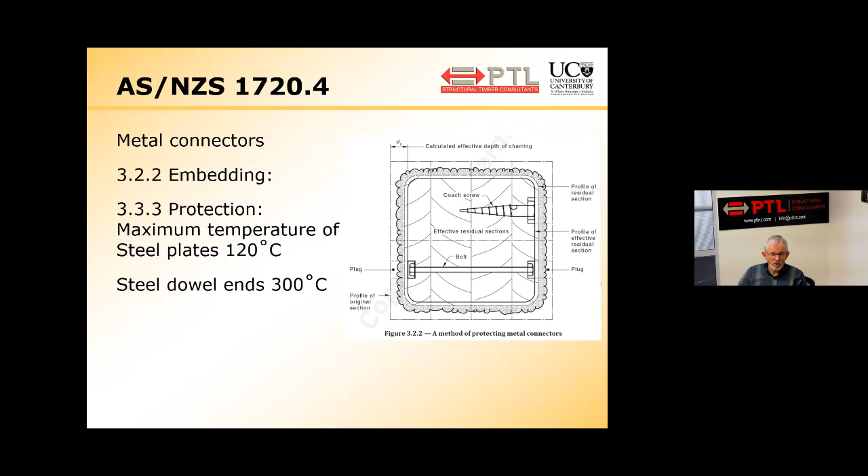Okay, I'm going to stop now. If you want more information on this stuff, there's some guidance out there. This NZ Wood Design Guide is only 20 pages, it's a good summary of all this stuff, and that's a free download from the NZ Wood website. Go and have a look at it.

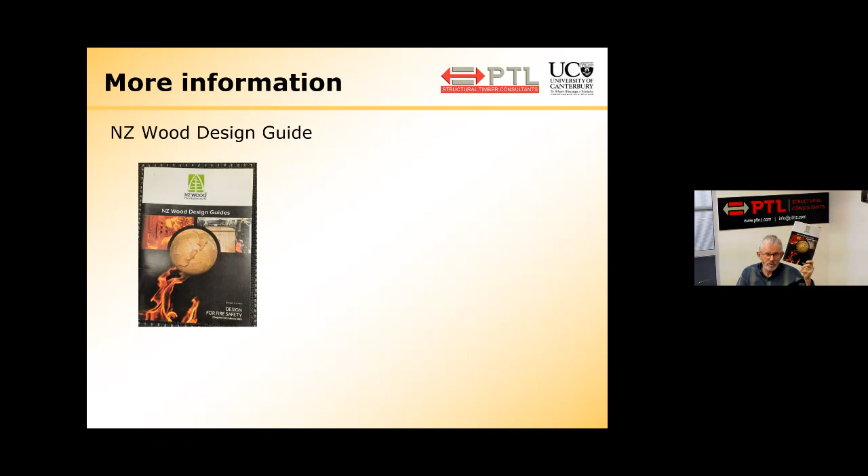If you want more information, this is my textbook, Structural Design for Fire Safety, which I wrote, first published 2001, second edition 2017 with Tony Abu as my co-author. Most of the stuff I've been talking about today is there in the book.

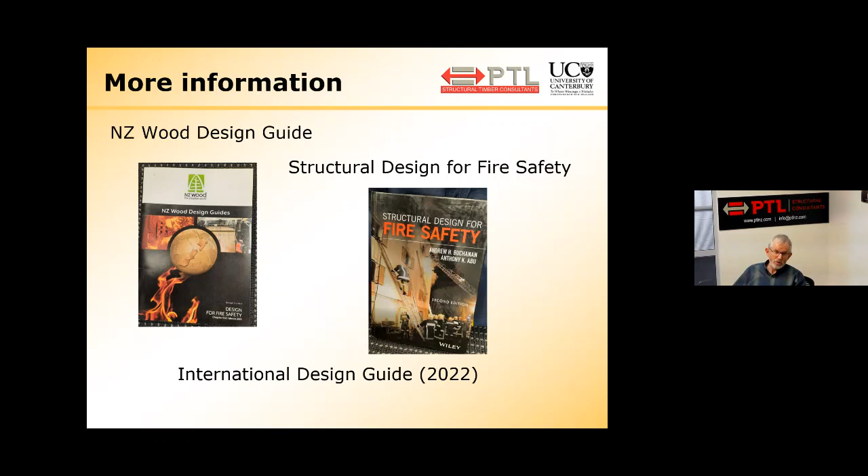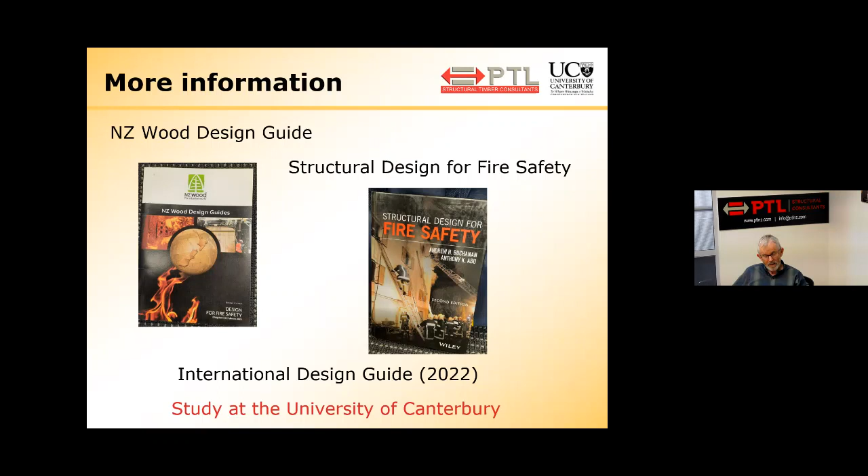There will be an international design guide coming out next year, which I'm working on right now with co-authors in a dozen different countries, including Colleen Wade from BRANZ, and Americans, Canadians, Swiss, Swedish and German people. But if you want to upskill yourself, my best advice is go to the University of Canterbury, enroll part-time or full-time, or just take one course in structural fire engineering, because they're the experts and there's lots there. Okay, I'm finished. Thanks very much.